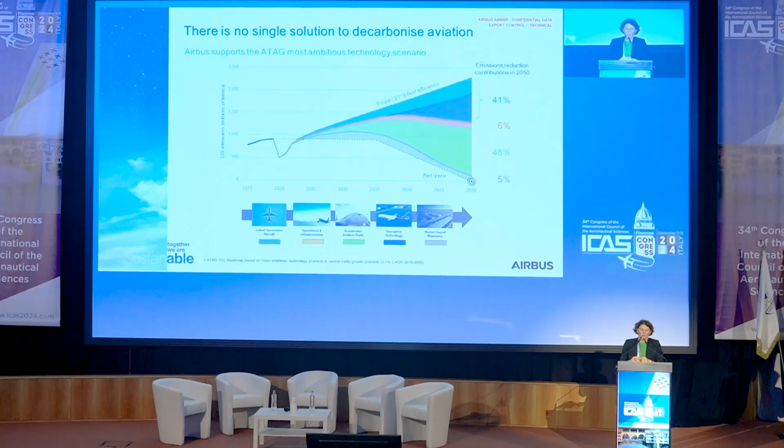In this, of course, we have everything around the fleet replacement. So the latest generation of aircraft, we shall not hide that we have already done a lot because CO2 is a major metric for our competitiveness.

If I give the example of the A321XLR, for instance, just certified in July and that will enter into service by the end of the year, we are 30% better versus the previous generation. It has nothing to do with the competition, it has only to do with the generation of aircraft. And this is true for a number of our aircraft at the latest generation that we need to renew.

However, the big and major challenge that we have now in front of us is what is the product of the future. So what is the product of the future? I have touched on the word hydrogen, but what is the new single aisle, what is the new wide body, and what are the ingredients?

The ingredients in an aircraft are always a bit the same. So you have propulsion, you have aerodynamics, and you have the systems. You had a detailed discussion yesterday with Frank about investigating propulsion and especially new propulsion systems.

I think here I want to manage expectations, because of course, as long as we don't have the answer and the demonstration on certain technology, it's very difficult to say how it will turn into a product. So we have a strategy to work with the ecosystem in order to understand what are the key parameters that go along this technology, whether it really makes a difference.

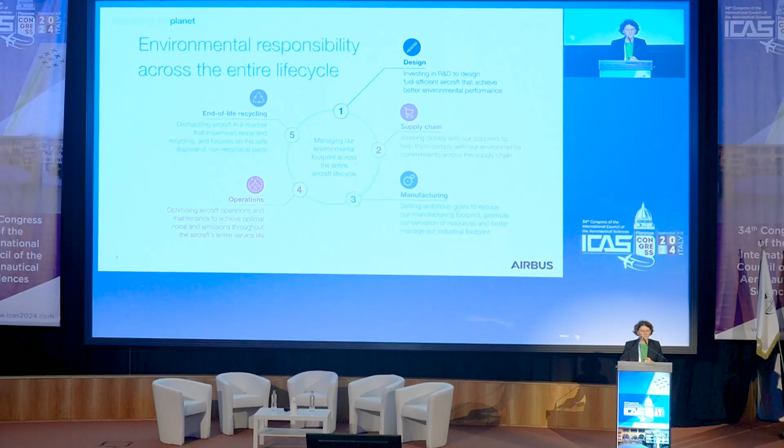Which means that all of this that I have described is a convergence between the OEM and the full ecosystem. And we had great achievements. The question we need to have is how we are building our ecosystem, and what do we get out of it?

For instance, what we have done on the multifunctional fuselage demonstration in the frame of Clean Sky 2, that was a European project, it's demonstrating manufacturing capability. We are talking here more about material, about recyclability and manufacturing capability, which is at the heart of what we are doing. Yes, we want to have an innovative aircraft, but we want to have something that we can produce and that we can ramp up.

So, ecosystem is absolutely key, all the more that sometimes we are not the major lever. And if you look at what we need to have for sustainable aviation fuel and H2, hydrogen, of course, the enablers are not the OEM, but we need to ask the right question.

I think that on sustainability, we have one polar star, which is really something common to aviation. I have the feeling it's a bit like board games. My kids are fans of board games. In the past, either you win or you lose. Now you have a lot of collaborative games around one goal. I think sustainability for aviation is that one goal.

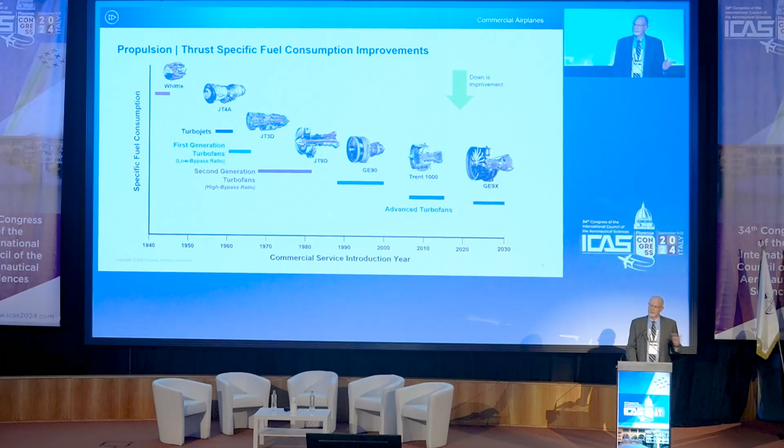During that whole time, though, reliability was an issue at the beginning—it was problematic. But this chart shows improvements made to those early turbojets and turbofans, and as the next generation of turbofans entered the market, a lot of the early issues were addressed. If you look at the current generation of engine technologies, while we do have issues, in comparison they're extremely reliable machines.

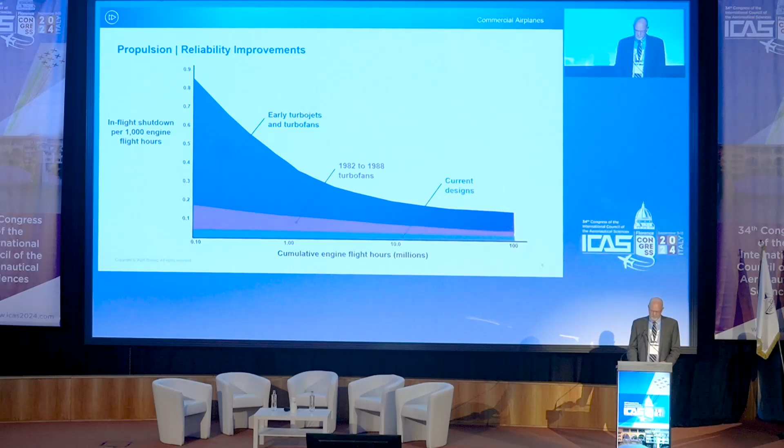This all helped enable a significant improvement in efficiency. In 1953, the FAA incorporated the 60-minute rule. The piston engines at that time were becoming more reliable, and the idea for the 60-minute rule would allow twin-engine airplanes to fly 60 minutes outside of diversionary airports.

But the 777 then went for early ETOPS, right? Because the reliability levels were increased so high that they were able to demonstrate right at certification 180 minutes. This opened up the world to long-distance, efficient twin-engine operation.

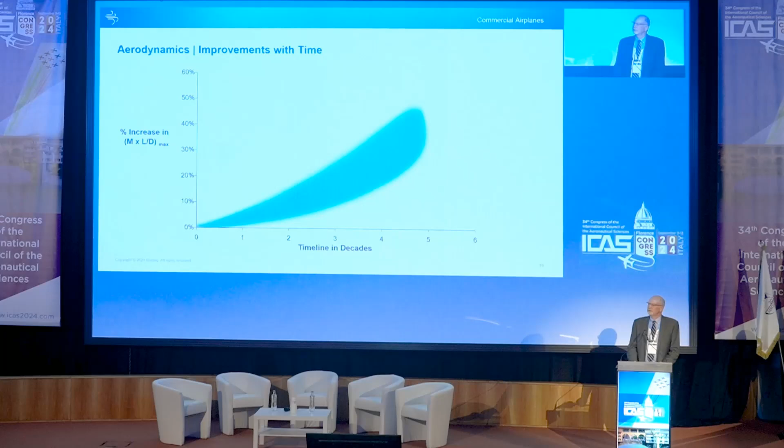The other level is aerodynamics, and the improvements over the decades, looking for greater efficiency in the airplane, largely driven around the wing. The early conventional airfoils were pretty good, but with the introduction of the supercritical airfoil, several improvements were available to us. Probably the most important one is the weaker shock wave, providing less drag. Also, the shape of the wing could be optimized to allow a deeper rear spar, which actually provided a more structurally efficient wing box design.

The 787, when we introduced composite materials, allowed us to do things in the wing design that previously we could not do with an aluminum airplane. Same with the 777X. When we designed that wing, we took all of the lessons from several iterations on the 787 and continued to drive the efficiency of the wing.

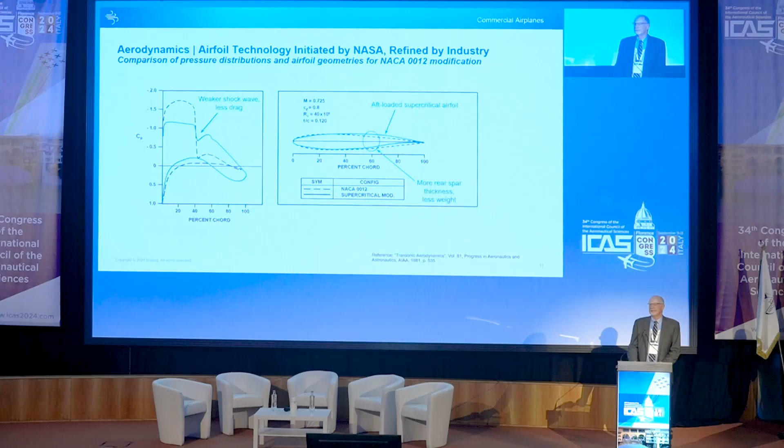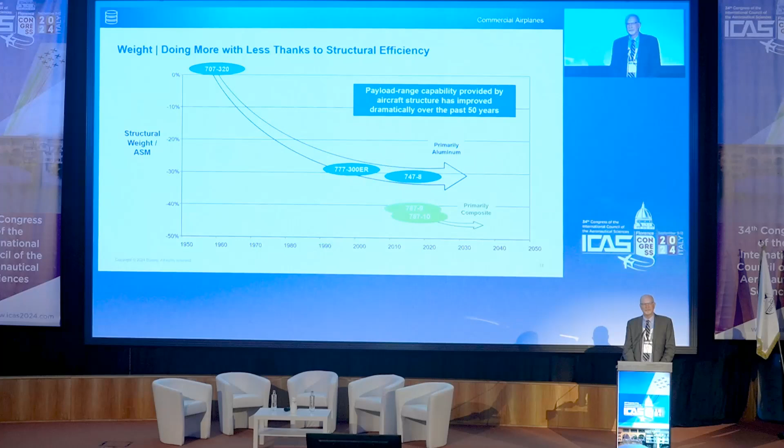So when you look at the weight, the third lever, significant advancements have been made over the years from the 707 as we optimize the shape and the architecture of the wing using more advanced alloys. And then, of course, with the introduction of composite technology, we've been able to take that to yet another level.

But, as you all know, there's no free lunch. Every program through development has been challenged with weight. Some of this is just a cause of the normal production process or development process, but there's also the increase of regulations, of requirements, certification requirements. Now, these are all actually good things because they improve the safety of the airplane. I think of nitrogen generation systems or reinforced bulkhead doors, secondary barriers, EME solutions, the way we size our ECS packs.

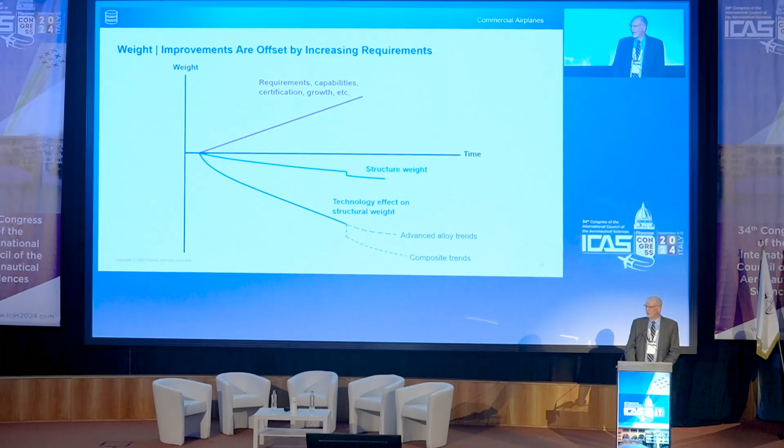I think about even the assumed weight per passenger. I guess we're all getting a little heavier, but all of these things drive weight into the airplane, and then the efforts that we have taken to take weight back out net out an overall improvement over time. So you have to look at all of these elements together, not in isolation.

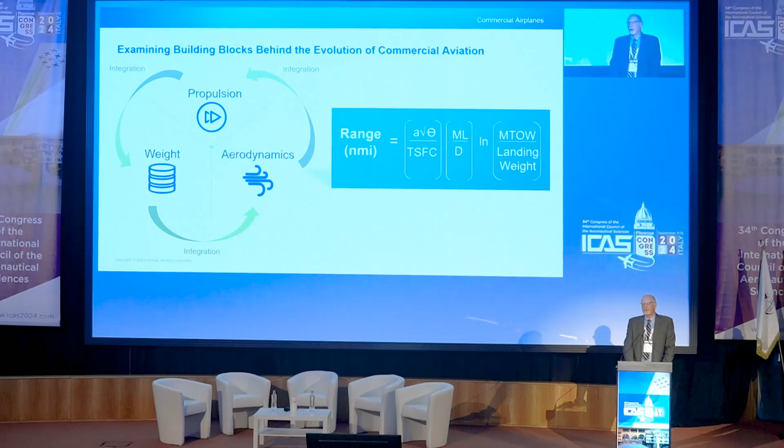The integration between propulsion and wing design is key. The integration of propulsion, wing, and weight, also key. A good example is the 777X. We evaluated the higher span wing, 235 feet. We added folding wingtips to keep it compatible in the current airports as a Code E airplane. So the weight increased, but overall delivered an improvement in aerodynamic efficiency.

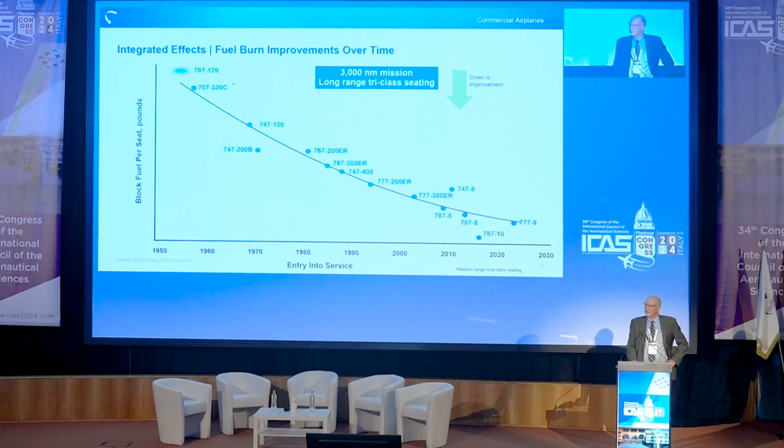So when you step back and look at all of these integrated effects over time, the block fuel per seat since the 707 has steadily improved generation over generation. You can see where the current aircraft models are setting new levels of performance expectation. I think Dr. Jim Heilman shared on Monday, the aircraft today use like 80% less fuel than those first generation jets. That's remarkable.

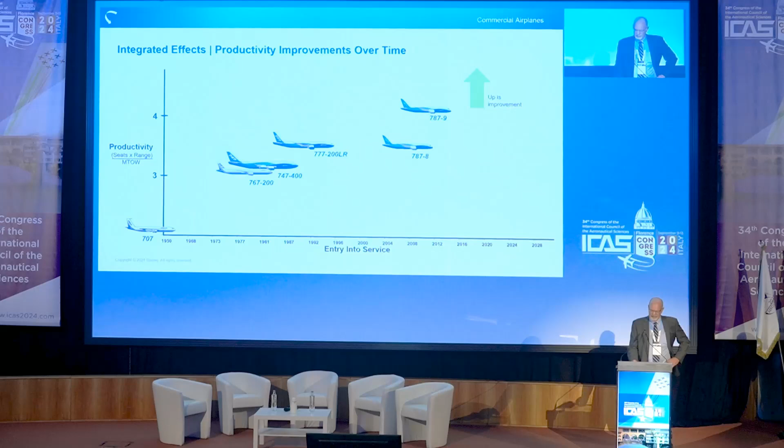You can also look at the integrated effects as productivity. If you think about seats times range divided by weight, airplane family after family, generation after generation, has increased productivity over time. If you went way back to 1930, it would take 10 days to go from London to Sydney with 32 stops. The 707 made a big jump forward and reduced that to 5 stops in 1.5 days. Today, you go direct. It's an incredible journey we've been on.

But it's not just about payload range. It's also about noise. We have to solve for noise, generation after generation, always improving. This shows where we've been from the 707, steadily reducing noise, being a good neighbor, and this is a key part of sustainability, continuing to drive down the noise of our commercial aircraft.

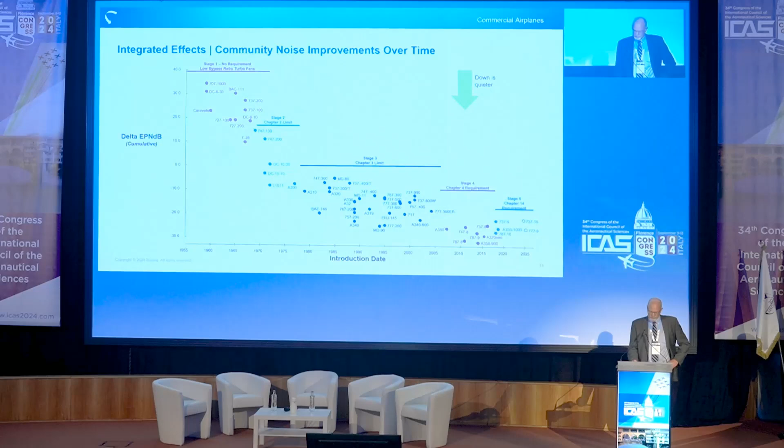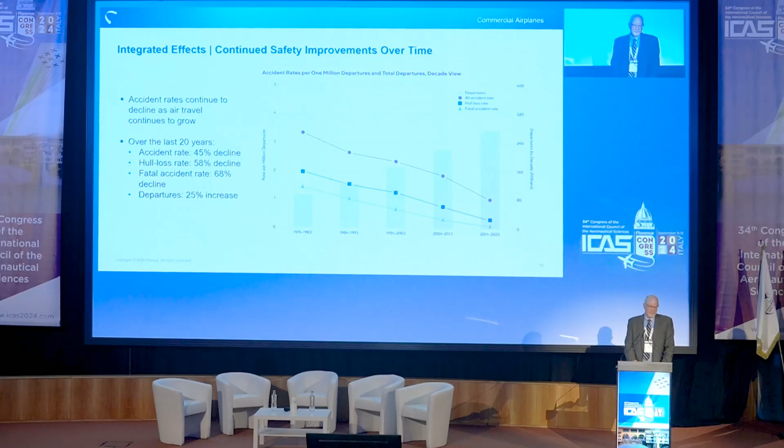When we think about all of these things that have been accomplished as an industry over the last many decades, and the problems and challenges of sustainability in the future, I think this is one area where we've got to take a very clear-eyed look at how we build and maintain this record of safety and efficiency we've enjoyed over these last 75 years.

I want to do a use case. We've been studying hydrogen-powered airplanes for a couple decades, and we've flown demonstrators of hydrogen cell and hydrogen combustion.

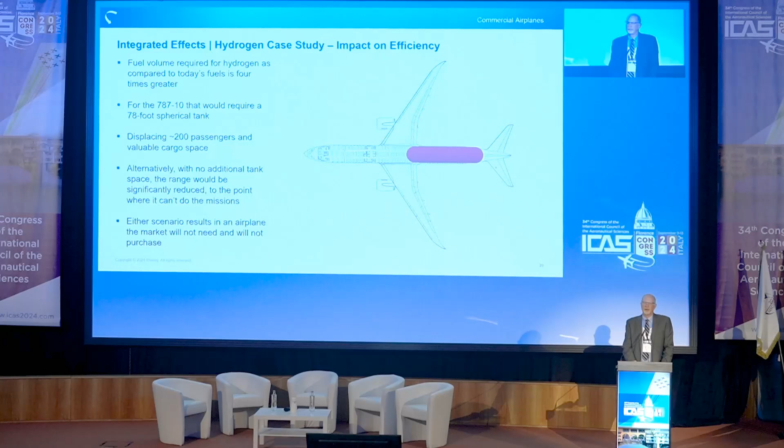But I just want to address two main principles of hydrogen that need to be solved to make this viable. Number one is just the volume. When you think about a wide-body jet, let's say a 787-10, that has 336 passengers in a 2-class configuration and flies maybe 3,600 nautical miles, in order to produce the same amount of energy you'd need a hydrogen tank that would basically be 78 feet long, significantly impacting the capacity of the airplane. This is a fundamental principle, and yeah, there are different vehicle architectures that could potentially address that. But I think the other element that needs to be addressed are the fundamental properties of hydrogen.

And it just brings me back to the development of the 787. This was in an environment where, in the wake of TWA 800, SFAR 88, and the new regulations around flammability and ignition, like FAR 25.981, all rolled out right when we were developing the 787. And it took significant invention, development, and innovation to be able to meet the demands with current Jet A aircraft on a composite wing.

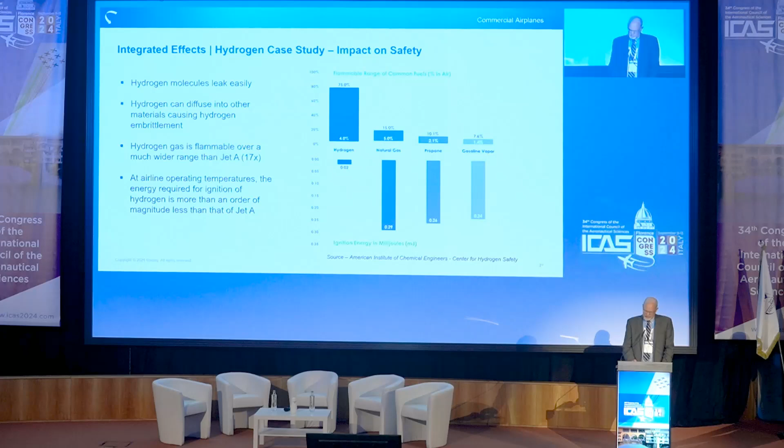And to me, this is something that really deserves and needs to be solved here to make hydrogen-powered aircraft viable.

So what's next? You think about where we've been, the journey of those 75 years. In propulsion, of course, we are studying with all three engine manufacturers the current technologies in their pipeline as we continue to drive efficiency out of the engine. In aerodynamics, the capabilities we now have with CFD and advanced computing let us explore different architectures and vehicle configurations that we've never been able to explore rapidly, iterate on to learn, and then go demonstrate. A great example is the collaboration with NASA on the X-66 to explore the efficiency of a truss-braced wing.

And then in weight, we continue to push the boundaries of advanced metal alloys and composites, leveraging the capability of an increased modulus fiber and how that can bring additional capabilities to the airplane.

Now, this is really focused on the performance, payload, range part of the equation, but another very important part of solving what's ahead is really the production of our future aircraft. Sustainability is a key component of production and end of life. You really need to take a full life cycle view of this.

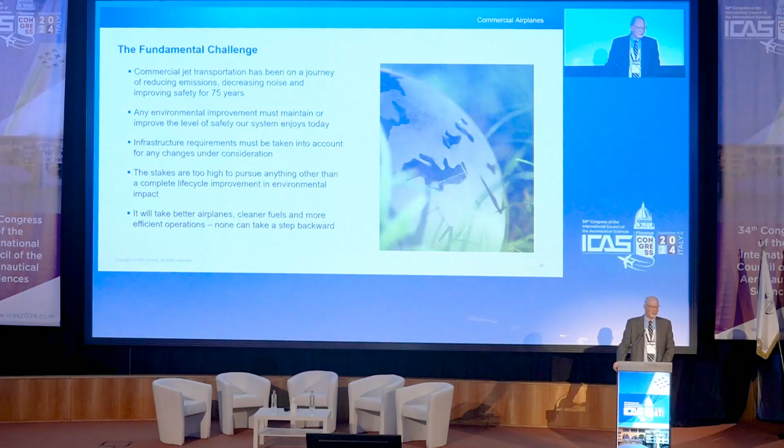It will clearly take better airplanes, cleaner fuels, and more efficient operations to meet the ambitious goals that we have. So with that, I will yield it back to Axel here and take any questions. Thank you.

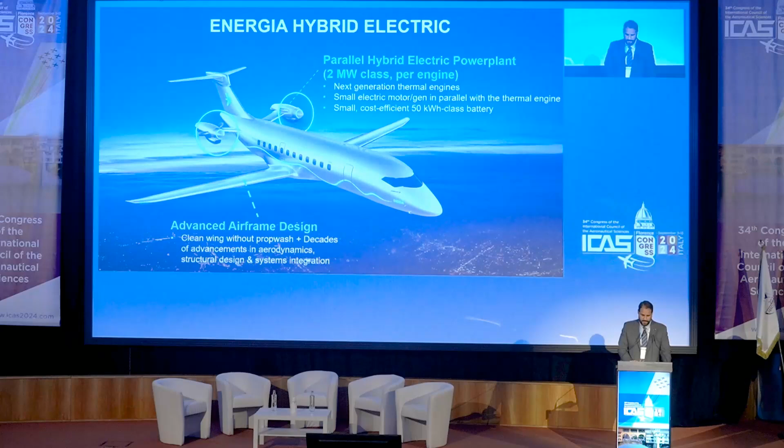Here is just more detailed information about this architecture that we chose. It's a thermal engine that has in parallel an electric motor. Every time there is extra energy from the system, we can use it to generate more electrical energy and to power or charge the battery.

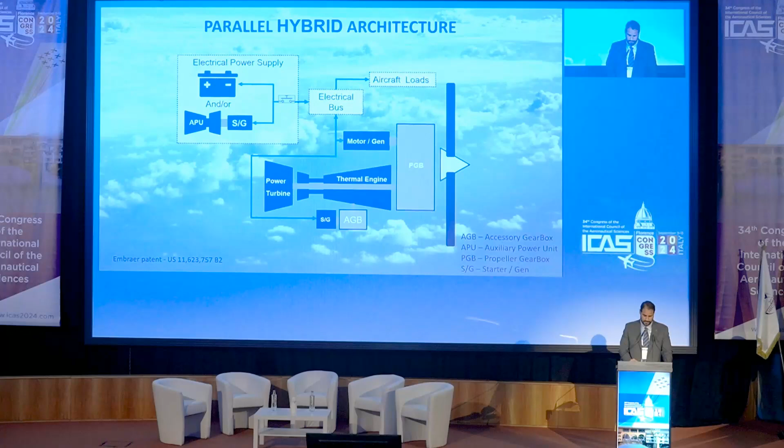In summary, the thermal engine is optimized for cruise and for taxiing in and out, takeoff and climb, and you use extra power from the electric motor. In case we need it for de-icing, for example, we also can use the electric motor. Why did we choose this architecture? Because small batteries are prone to be available and could already bring a reduction of up to 25% of CO2 emissions with this architecture.

The other architecture that we've chosen, or are studying, that we think we can have technology readiness by 2035, is the Energia fuel cell, where we use, you saw that in the electric, small motors. Here we use a 2.5 megawatt electric motor, it has a higher weight. It weighs more. The wing of this aircraft must be larger than the one for the electric or the improved gas turbine.

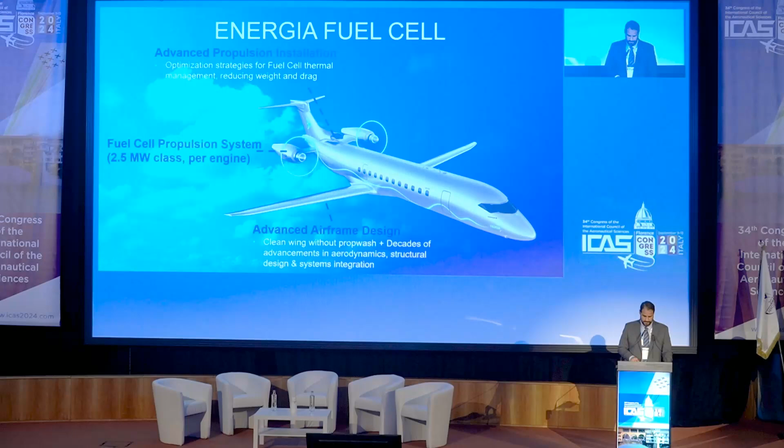And the last one, more challenging, more in the future: how can we cope with the heavy weight or the volume of hydrogen? What we are thinking is that we should optimize the hydrogen just for the small routes.

If more than 80% of the routes are for 250 nautical miles, the hydrogen tanks and systems should be optimized for those missions, and we could use the wings with jet or SAF when needed to have a longer flight.

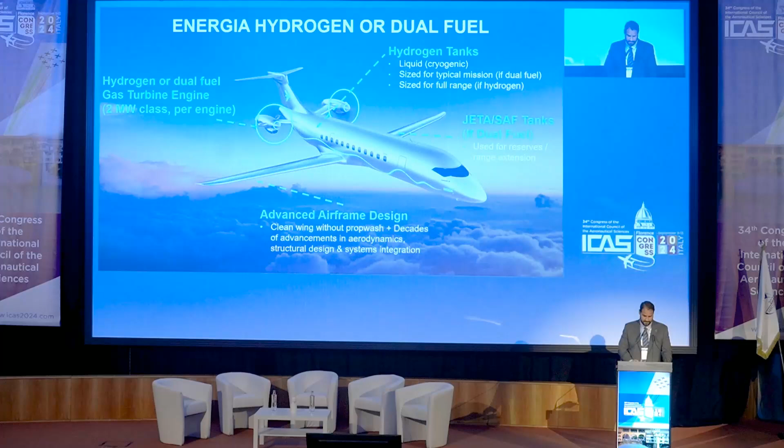So we could anticipate the entry into service of an aircraft like this. But we are looking for a feasible solution. That's why in each concept we are trying to just introduce the technology as needed. And the challenges are not just technical, as we mentioned before - it's also infrastructure and also economic. We need to have the right technology at the right price to have a product that the society can use for their benefit. And that's it.

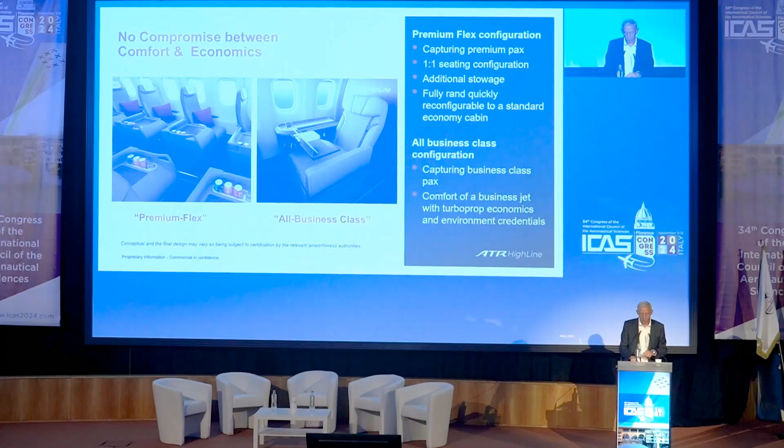I will not show the same ATAG picture, but it's roughly the same idea, Cleiton, I agree with you. It's to say we have operations, ATM, technology, and SAF. I don't put the percentage because all along the week, Axel, I think we have seen that all percentages are different.

So as of today, if you take more generally a turboprop, in particular on ATR, which is the only one produced, but more or less a turboprop, you can divide by 2 the CO2 emissions. This is due to the efficiency of the aircraft. It's not by chance, it was evolving, but more or less, this is the technology already. Again, not adaptable to all circumstances.

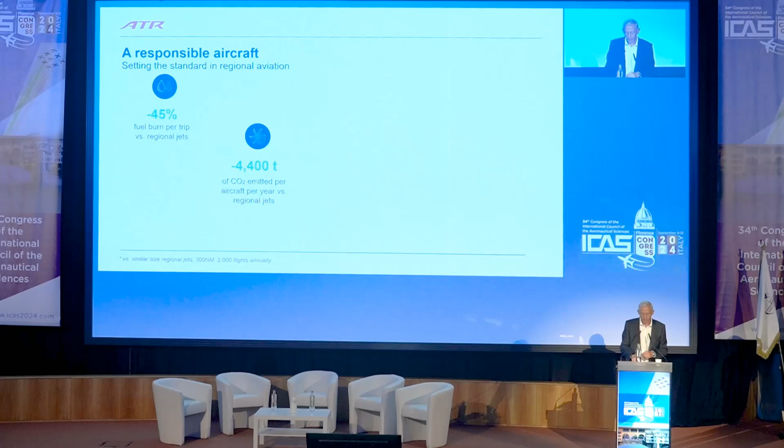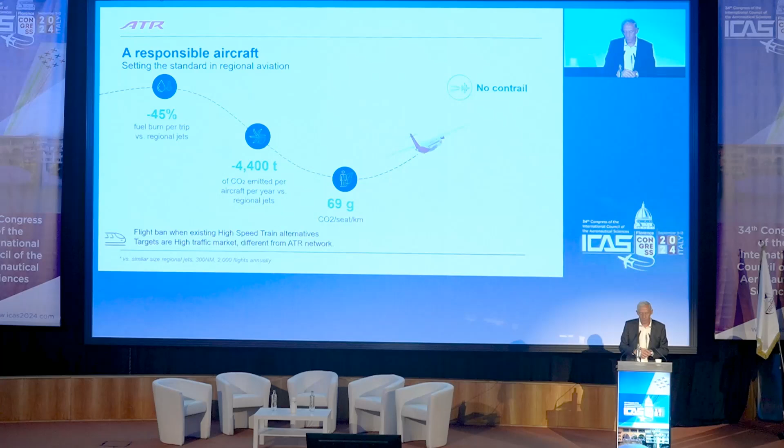Just a few minutes to discuss the flight ban. It's an interesting discussion, but the high-speed trains that we have in Europe, for example, where aircraft and aerospace companies and airlines are put in competition, are for me not relevant. We are not addressing the same type of market as the high-speed trains. So for me to compare apples and oranges makes no sense.

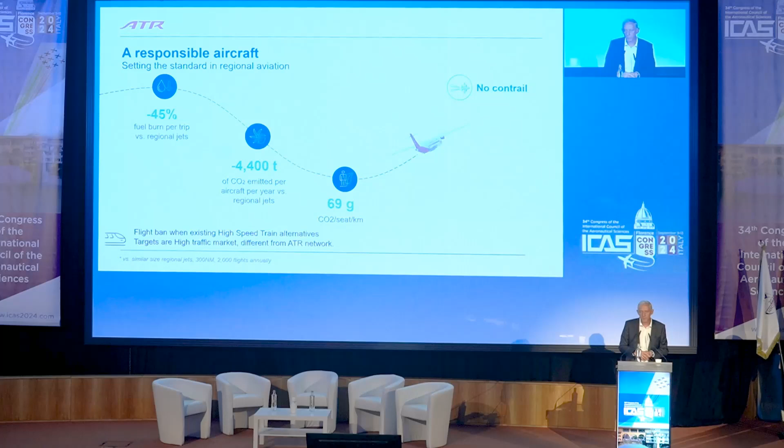We are not doing the same things. Infrastructure is fully different, number of passengers is fully different. So I think it's not relevant, for example, to close one route if it's adapted to some particular passengers. But of course, if we are in competition with a high-speed train from, let's call it, Bordeaux to Paris, if there is something in place and working well, why not?

It's providing -3% on CO2 emissions. It's quite an improvement, but it was an evolution, not a revolution, as Isabelle said.

Second topic, SAF. I will not enter into details, I think my colleagues already did. Here, we are linked to the ASTM certification, and I think I have not heard too much this week about this limitation. I think the aircraft manufacturers are quite ready to work on SAF, but they need to be supported by the SAF manufacturers and additives manufacturers, which I don't see quite motivated. I think it's an interesting topic maybe for the roundtable, despite the fact that, and I agree with my former colleagues, the production is not at the level that we want.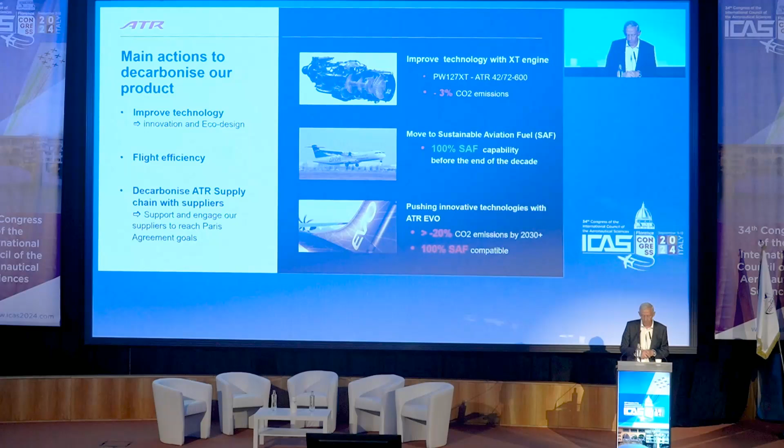And third topic for the decarbonizing, this is of course the Evo. So you see here the -20%. I will jump into details because we want to target more than 20% CO2 emissions with additional features.

First topic, may I ask you to look on the gearbox which is on your left. It's really used for the potential improvement that we will have for the hybrid propulsion. So this gearbox is really something which is very interesting for the evolutions we want to put on the Evo.

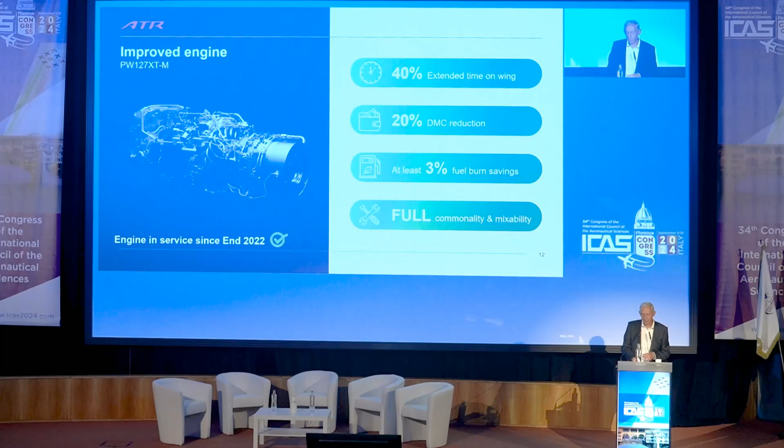But first, the aim of this improved engine was to reduce the maintenance cost, to reduce a bit the specific fuel consumption. It's done, and it's been in service for quite a while. The airlines are quite happy, not seeing only 3% fuel burn, but more.

SAF - we were the first aircraft in 22 to fly on both engines with non-drop-in fuel. It was with a full commercial and delivered aircraft with Pratt's. It was without additives, and it was a non-event.

Since a while, we are working, of course, with all the authorities, and especially the ASTM. I have put in terms of timeframe ASTM as relevant because here we are, I think, limited. I think all the aircraft manufacturers are motivated to modify their aircraft - gauging, weighting, and so on. But I think we need here to push a little bit.

So now a bit of trade-offs that we made in ATR and within the mother companies about what could be the evolution of the ATR in the future, jumping into the Evo. The first line is the reference, the datum, the ATR 72-600, 72 pax, more or less 200 nautical miles of average mission. Just below, you see the all-electric, meaning with batteries.

I have put mission in terms of range. The below 10 pax, it's far below because we are not sure that we even can put some passengers here, so more suitable for very small modules. We were discussing, and I agree with you, Cleiton, the batteries in terms of density energy is difficult. For an ATR, the class is above what we can accept, so this is not a good solution. Reminding you, on your top right, an aircraft like an ATR or turboprop in this class is around 4 megawatts of peak power.

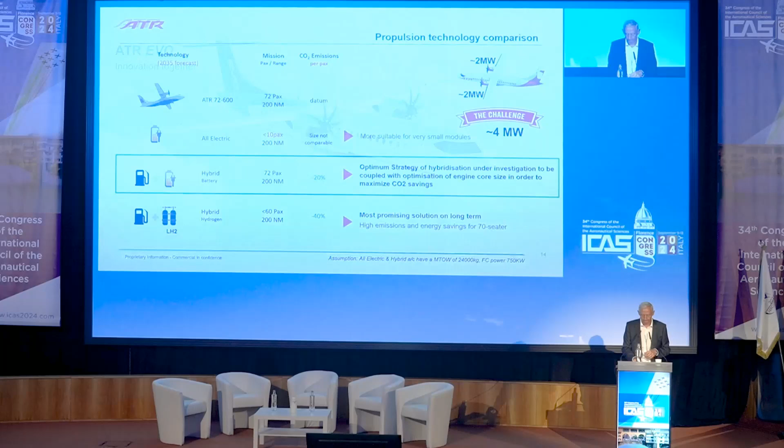So what is the Evo? The first aim is, of course, to reduce CO2 emissions and to do adaptations and enhancements. The main announcement is, of course, dedicated to the propulsion system, again with a hybrid solution. I will come back to that more after.

The first aim was minus 20%, and we are today discussing with the Clean Aviation team, with Axel's team, to even improve this. The minus 20 will be given mainly by the propulsion system. Let me say, a new engine, a new thermal engine to make it clear, and electrical motors plus the batteries.

And we want to go more on some enhancement. We'll jump into the maintenance cost very rapidly. We need also to decrease our maintenance cost to keep the aircraft economically viable. Entry into service, I already explained. So we need to be more sustainable, but we need to be also more profitable. A very good aircraft shall be sold to companies to make also money, so we need to be clear on that.

So I suggest that we go quickly. I already explained all this. And more jumping into some techniques: 4 megawatts of electrical equivalent energy.

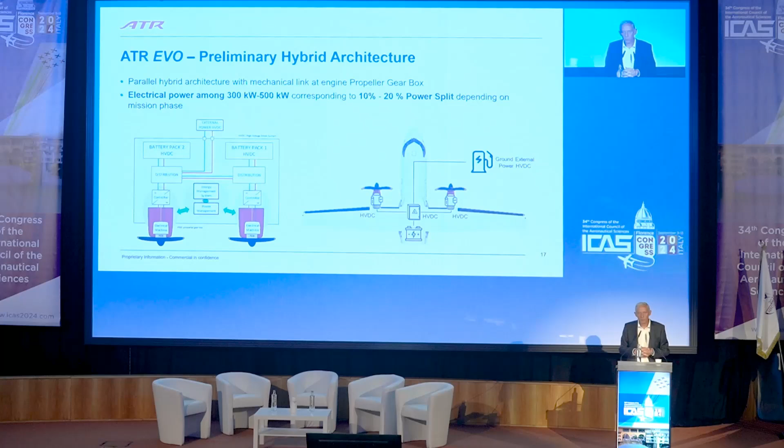In terms of missions, where can we use it? The main aim is, of course, to reduce a little bit the size of the engine. I want to make clear that mild hybridization shall afford something, so it has to pay the payload it's done for. And for me, this mild hybridization shall be here to also reduce the thermal size of the engine, to be able, when we have the need, to help this thermal engine.

You see that we target two main points. In fact, the two main points of usage during the mission are the ones related to the max power that we ask on our engine. The max power of the engine is designed on the takeoff, of course, and the top of climb. All the rest of the mission is with lower energy demand. The cruise, of course, and all the rest.

So we need to downsize the level of the thermal machine to be able to be used in parallel of the electrical motors. And this is what you see here in sequence. So that means during takeoff and top of climb, we use the electrical energy that you have recharged on ground to be more sustainable. So this is helping the engine. And for the rest, you can recharge on flight, but of course, it's not a free lunch. We will consume some energy.

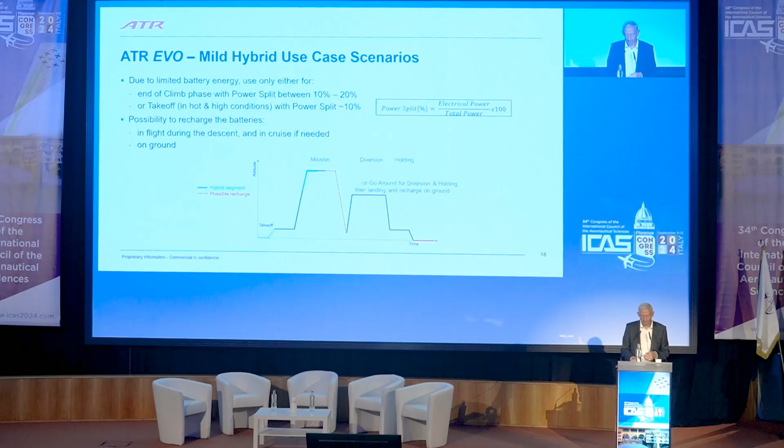Let me jump into two projects that we are working on. So you know that the regional market and in parallel the turboprop is of course the first big step in terms of sustainability, where we can do something. We can bring, and there is a lot of development, be it in hybridization, be it in hydrogen, be it in a lot of other technologies. And two projects are really supporting us.

First in France, this is what we call the CORAC. So this is a research organization called by the GIFAS. And we are developing, with this financial situation, a concept, and we are supported by it.

The second one, and this is where I think it's quite a very good opportunity, we are supported by the Clean Aviation program, which is quite important for us. The Clean Aviation makes concrete things and puts effort and is forcing the OEMs like us to have concrete results, and not only R&D. So this is where we are today.